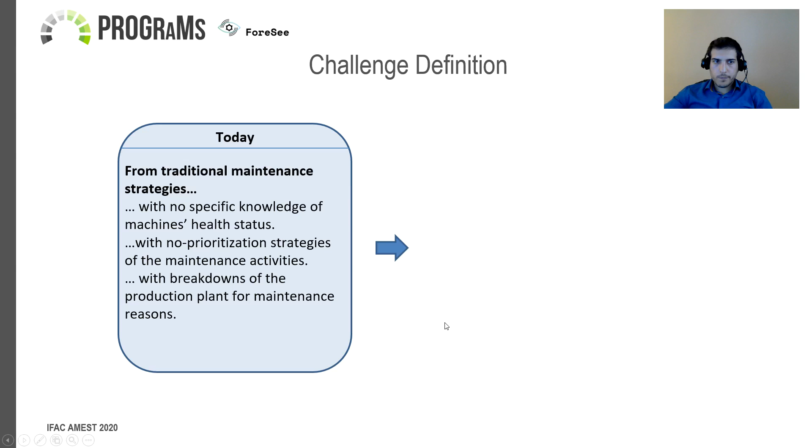Starting from the challenge definition, today there are lots of traditional maintenance strategies with no specific knowledge of machine health status, no prioritization of maintenance activities, and with lots of breakdowns of the production plant for maintenance reasons.

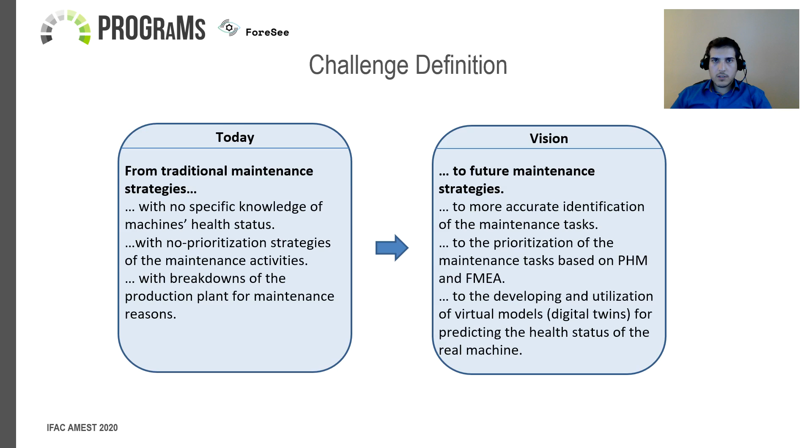PROGRAMS' vision is to create a framework for more accurate identification of the maintenance tasks, the prioritization of maintenance tasks based on prognostics and failure analysis, and the development and utilization of physics-based virtual models and the digital twin concept for the prediction of machine health status.

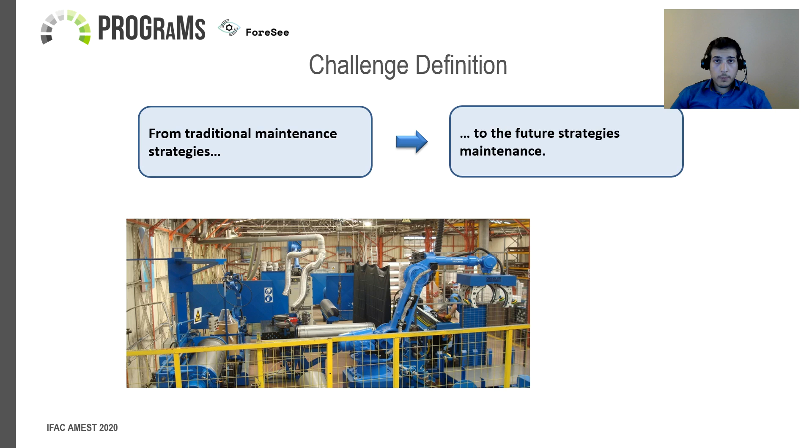One demonstrator of the PROGRAMS project comes from the solar industry. More specifically, here you can see an image from the production plant which produces solar boilers. PROGRAMS uses a number of sensors and machine controllers in order to collect all the required data through the ECM, the equipment control module, and then all the data are provided to the different modules of PROGRAMS for failure analysis, calculation, etc.

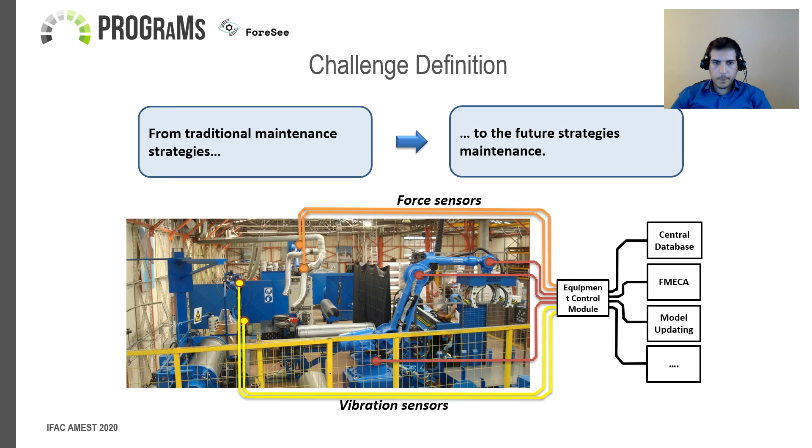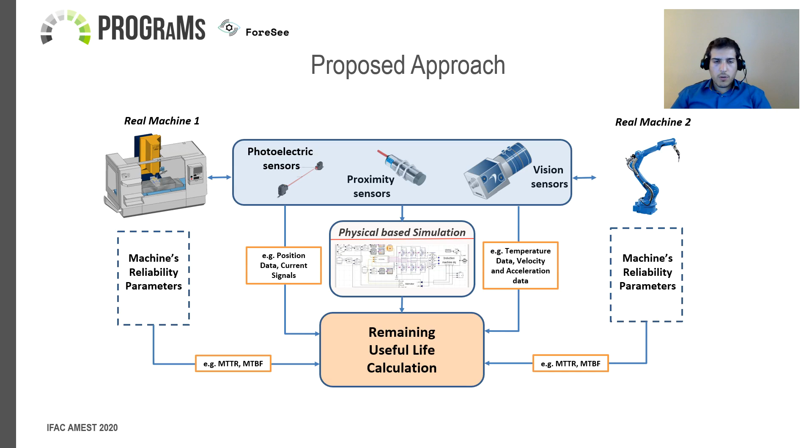Moreover, physics-based simulation models are used also for the prediction of the future degradation of the machine. All these modules and data are used for the RUL calculation.

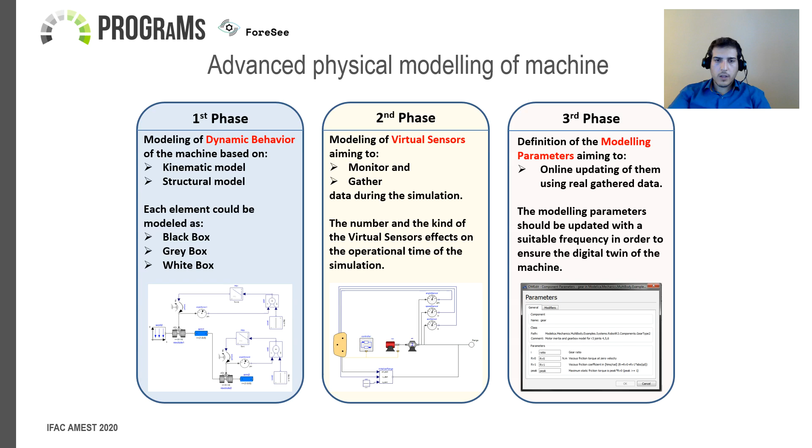Initially, in PROGRAMS, we created an advanced physics-based modeling methodology for a machine. This methodology consists of three main phases. The first phase is about the modeling of the dynamic behavior of the machine. The second one is about the modeling of the virtual sensors inside the digital model, and the third one is about the definition of the modeling parameters of the model. Each phase will be analyzed below.

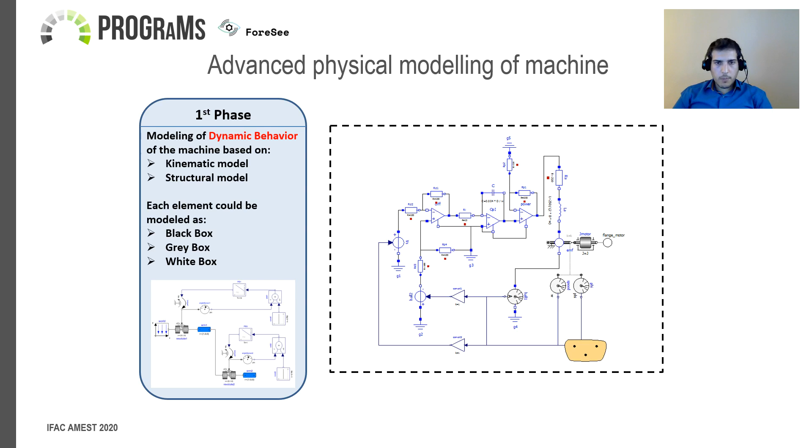So, starting from the first phase, we talk about the modeling of the dynamic behavior of the machine based on the kinematic model of the machine and the structural model of the machine. Each element can be modeled as a black box, gray box, or white box. On the right side of the slide, you can see an indicative example of how this model is.

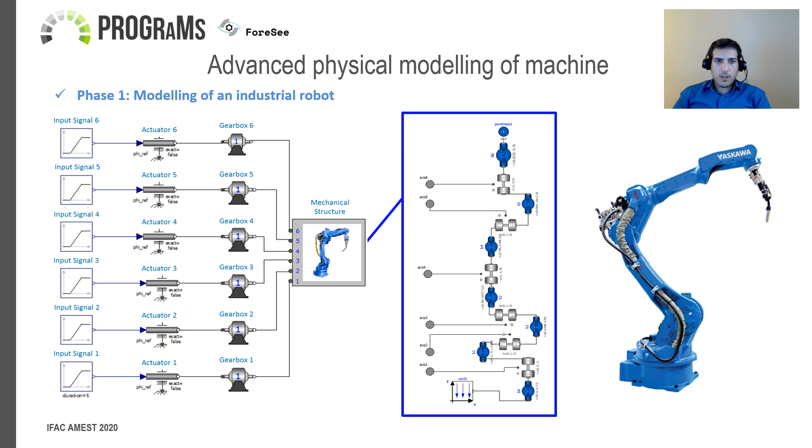Here you can see the implementation of this first phase in the PROGRAMS project. More specifically, we have created a digital model of a robotic structure. This model consists of a number of components like the actuator, the gearbox, and the mechanical structure, while each of these components consists of some subcomponents. For example, in the mechanical structure, you can see here that there are some components which represent the real machine's joints and links. The physics phenomena are embedded inside these subcomponents.

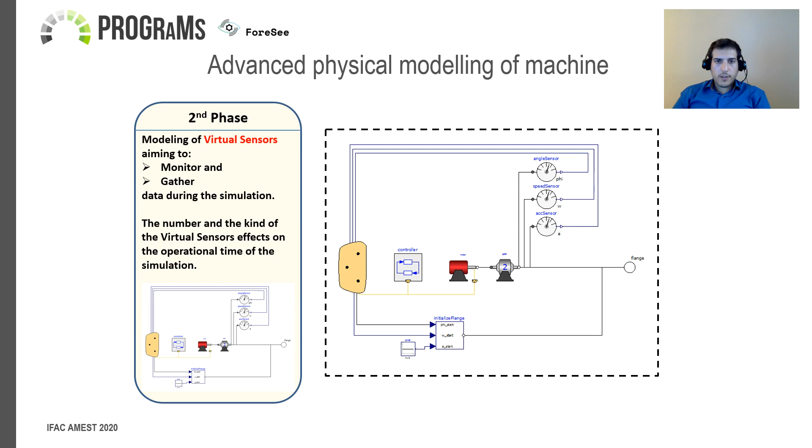In the second phase, we talk about the modeling of virtual sensors aiming to collect data which we cannot gather using external sensors. On the right side of the slide, you can also see an indicative example, while in the next slide you can see how we have integrated the virtual sensor inside the digital model, and more specifically in the gearbox component of the digital robotic structure.

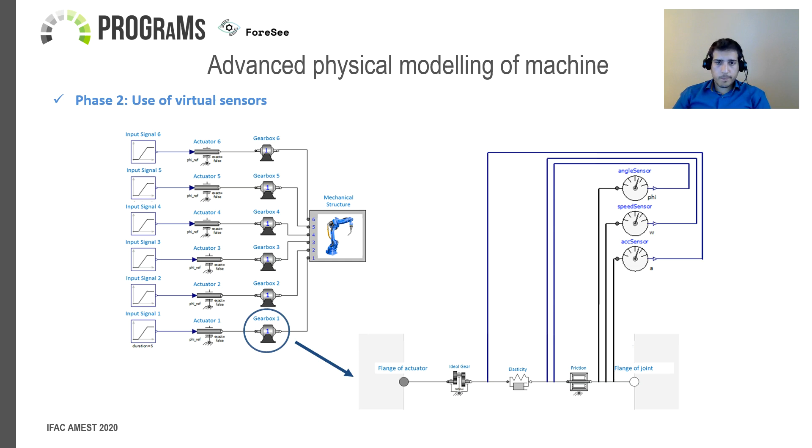More specifically, here you can see three types of virtual sensor. We have one virtual sensor to monitor position signals, one for velocity signals, and one for acceleration signals. All these data are used for the RUL calculation.

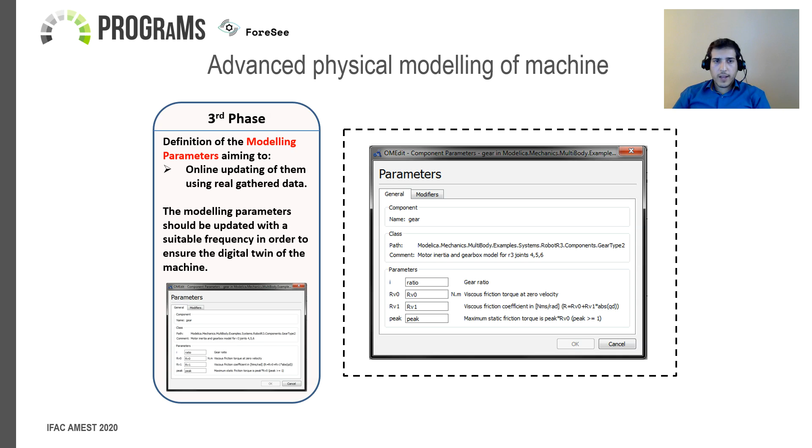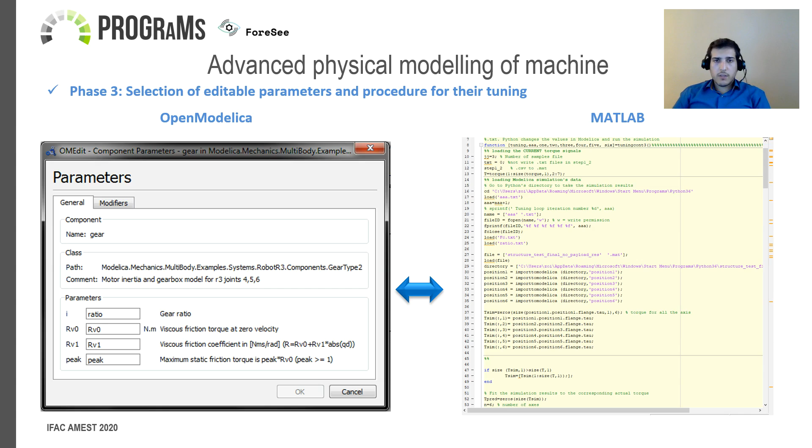Then we have the third phase, which is about the definition of the modeling parameters. Modeling parameters refers to the parameters which should be tuned and updated over time, aiming to enable the digital twin concept. In PROGRAMS, we have created a MATLAB code which identifies the values of these parameters based on the real data coming from the machine and the external sensors, and then the identified values of the parameters are imported into the digital model.

Regarding the tuning of the models aiming to enable the digital twin concept, the steps are: first, data gathering from the real machine, then analysis of them, and data synthesis techniques are performed, aiming to identify the values of the modeling parameters. These values are imported inside the digital model, aiming to have a digital representation of the real machine, which will have the same behavior as the real one.

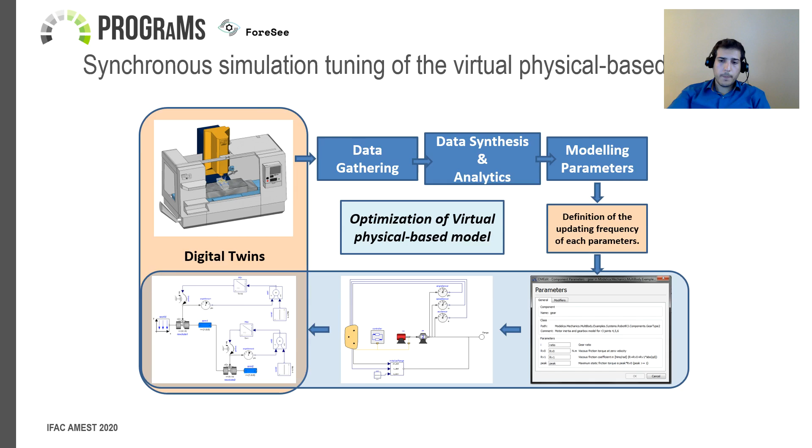Talking about digital twin, I would like to shortly highlight that as digital twin, we mean that if we provide the same input to the real machine and the digital model, then the real output of the machine and the simulated output of the digital model should be almost the same.

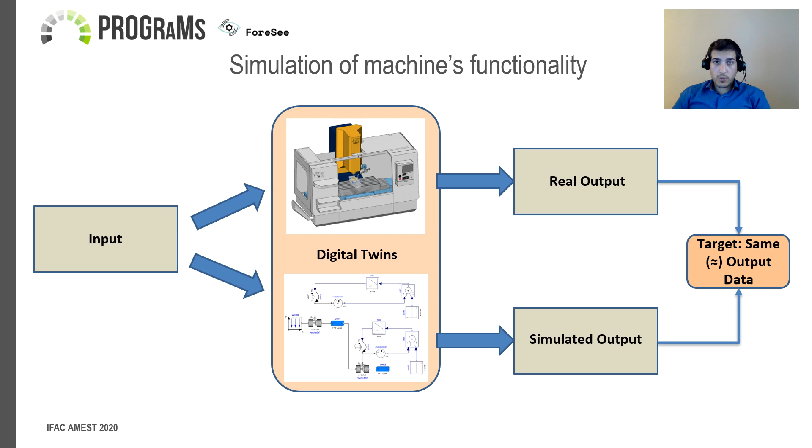Regarding now the RUL calculation, as I said before, we use data coming from the real machine controller, from sensors and virtual sensors. Of course, inside the virtual sensors and the digital model, we also take under consideration the future production plan, so we collect data from the ERP system of the production plant.

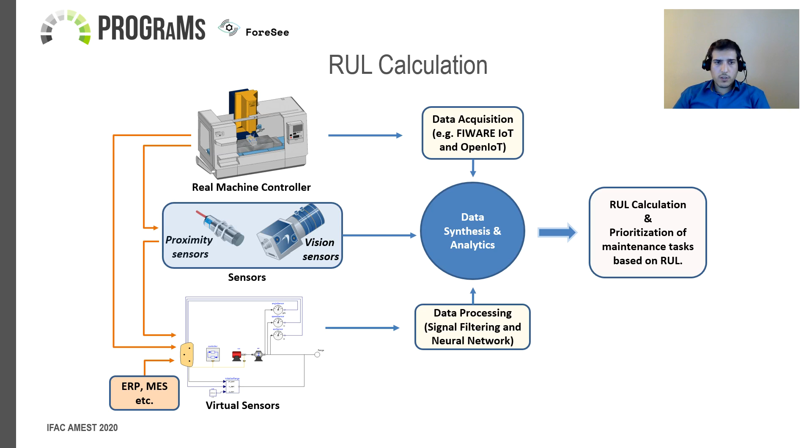For the data acquisition, we use technologies like FIWARE IoT and Open IoT frameworks. We perform data synthesis and analytics aiming to calculate the remaining useful life of the machine's components. Then, based on this remaining useful life, we go ahead with the prioritization of maintenance tasks, taking under consideration the production plan of the industry.

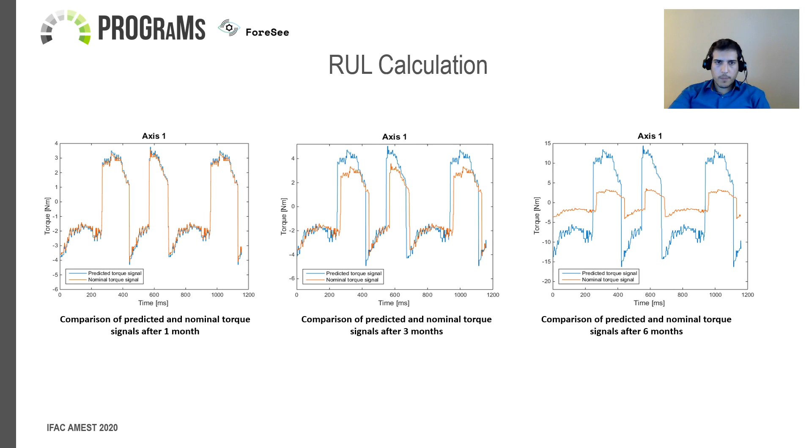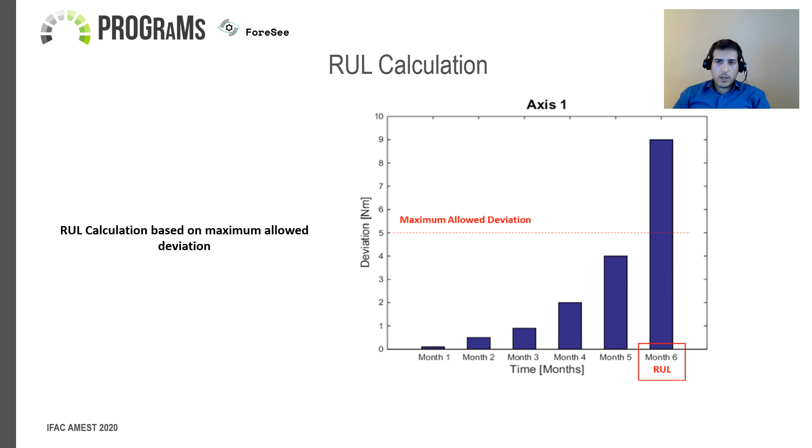Then we can calculate the RUL based on the maximum allowed deviation, which is defined by the production manager of the production plant. More specifically, you can see that in month 6, the deviation between the two torque signals is bigger than the maximum allowed. So we can say that the remaining useful life for axis 1 of the robot is 6 months. Of course, this is an indicative example, and in PROGRAMS we calculate the remaining useful life on a daily basis.

As a conclusion, we can say that the aim of the present approach is to provide a satisfactory solution for the calculation of each machine component's RUL, aiming to be used for predictive maintenance. The direct benefits are the online prediction of the machine health status without stopping the real machine's operation, using simulation models.

The gathered and predicted data can be used as input to statistical analysis for the prediction of the machine health status, and the user is able to know the future machine's condition and how it will be affected by the execution of a task, even before its execution.

So all these activities have already been performed in PROGRAMS, and now we are working on the final integration of the module in our demonstrator.